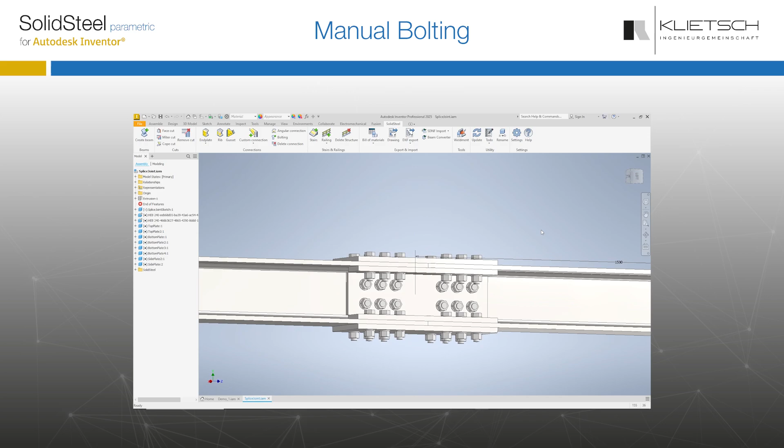Welcome to a short tutorial on manual bolting with SolidSteel parametric. The video is a supplement to the manual, which you can open at the appropriate page by pressing the Help button in the tool dialog.

This is our demo assembly, consisting of two beams to be joined with a splice joint using bolts. Okay, we start the manual bolting tool and select a hole feature first according to the order specified in the dialog. We see the selected hole feature highlighted in 3D and also listed in the selected positions in the dialog.

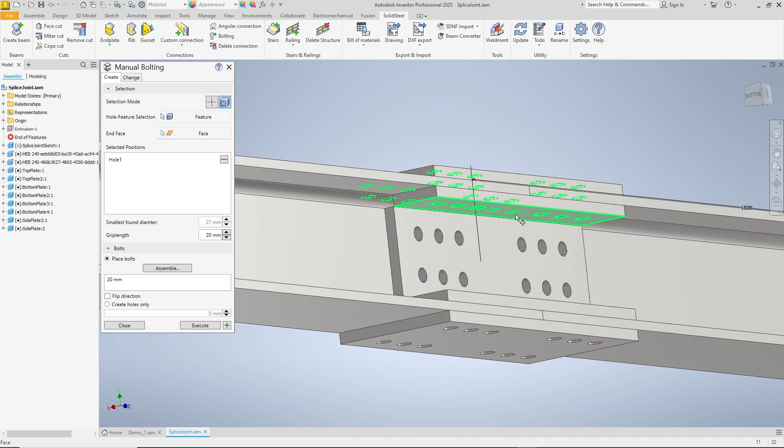Next, we select the end face for the bolting. The required grip length is already displayed at the bottom, and by clicking on Assemble, we open the part selection where the bolted connection is defined in detail. We select the desired standard and diameter and click on Add to add the bolt. Another click on Default Mountings adds two washers and a nut matching the screw standard.

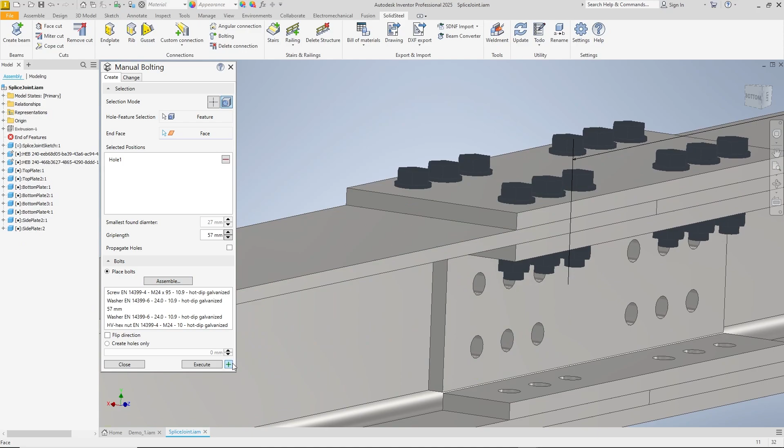The bolted connection is now defined and can be confirmed. The preview also looks correct. We can confirm the manual bolting dialog. I do this by clicking on the plus. This keeps the dialog open for further bolting. The whole thing again here below.

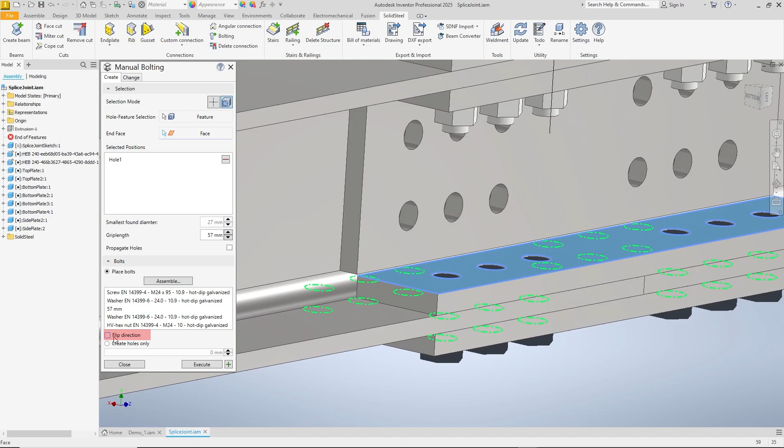First we select the hole feature. This time we get an immediate preview because SolidSteel has remembered the last settings. We then select the end face to define the grip length. We could confirm immediately, but I flip the direction of the bolts because it is easier to assemble on site if the inserted bolts do not slip out of the holes. We can confirm to insert the bolts.

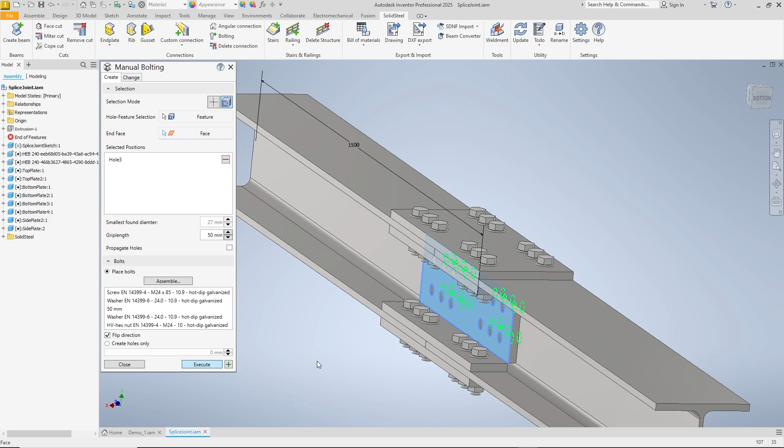All that is missing now are the bolts on the web. The sequence is the same as before. We select the hole feature first, and then the end face. The preview is already shown on one side, and when we confirm, the changed grip length is automatically taken into account and the washers and nuts are also added correctly. Okay. That's how quickly we place 36 bolts, 72 washers and 36 nuts with SolidSteel parametric for Autodesk Inventor.

But the manual bolting function can do even more. It can not only create bolts, but also automatically create the corresponding holes in the same step. Here in our second example, a side-mounted railing is to be bolted and, as you can see, there are no holes in the mounting plates. We will use the bolting dialog again, but this time in sketch point selection mode, which you can set at the top of the dialog.

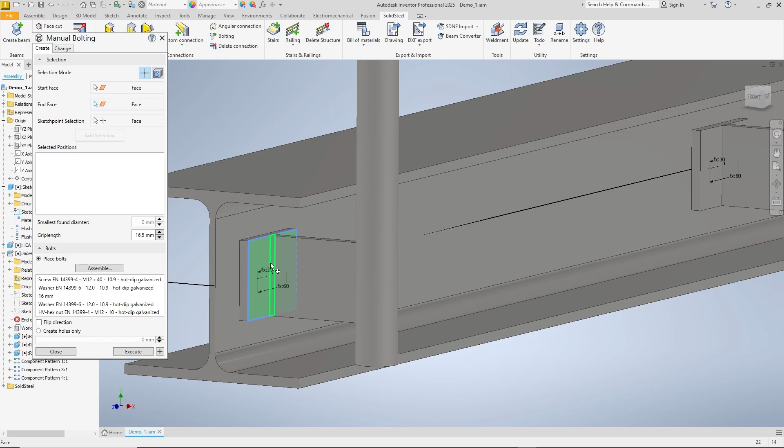We will now first select the start and end faces for the bolted connection. This time we define the position of the bolts using sketch points. We can select all the relevant points at once. I speed up the selection so that the video doesn't get too long. When all the points are selected, I add the points by clicking Add Selection.

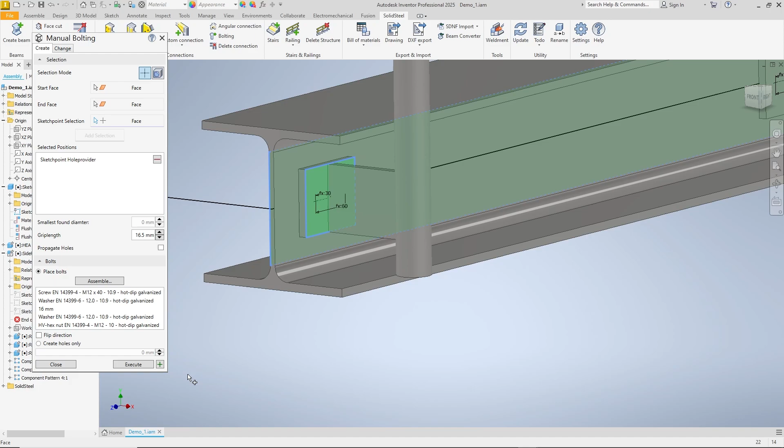There is no need to open the part selection with the Assemble button this time, because the last assembled bolted connection displayed here also fits this connection. We can confirm and all 8 bolted joints are inserted. If we hide the SolidSteel folder where the fittings are located, we can also see the automatically created holes.